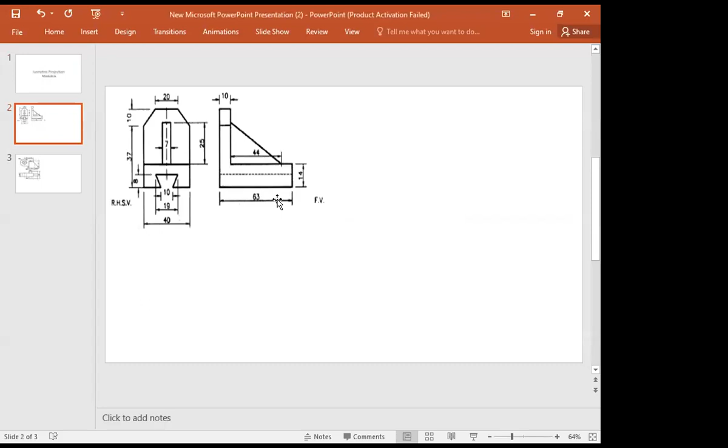Isometric projection.

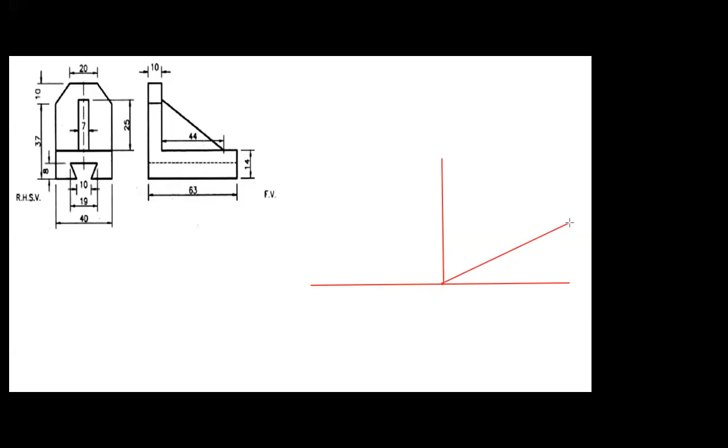Students, just have a look. From this point you have to make two lines. The two lines will be at an angle of 30 degrees. One you make here and one you make here, 30 degree inclination. Two lines you have to make at an angle of 30 degrees.

Now the question comes, what is the length of the line? You can take it random, but both the lines are at an angle of 30 degrees with the horizontal.

Light line you have to make it, guys. Later on I'll use some other color to mark where the things need to be made dark. So light line right now, make it.

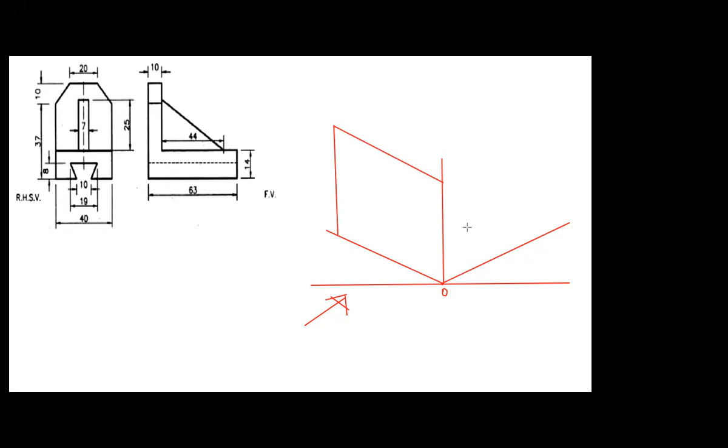By taking that 63, what we will do is we will create a box. ऐसे हम box बनाते हैं। ठीक है? ये 63 होगा इतना, and this is how much, which is your height already बताया था 47। ये 63 by 47 का हो गया, ये 63 हो गया और ये 47 हो गया। This is 63 and this is 47. Make the box, come on।

Now the whole thing will be working on the frame of roller scale. This line will be parallel to this line and this line will be parallel to this line। ये लाइन इससे parallel होगी और ये लाइन जो है वो इससे parallel। Use the roller scale and things will be going in a proper way - रोलर स्केल यूज करके ड्रॉ करो। ये लाइन 63 होगा, ये 47, and then you make a box. It will seem to be like a rhombus, but yes, it is fine. Once you are done, let me know।

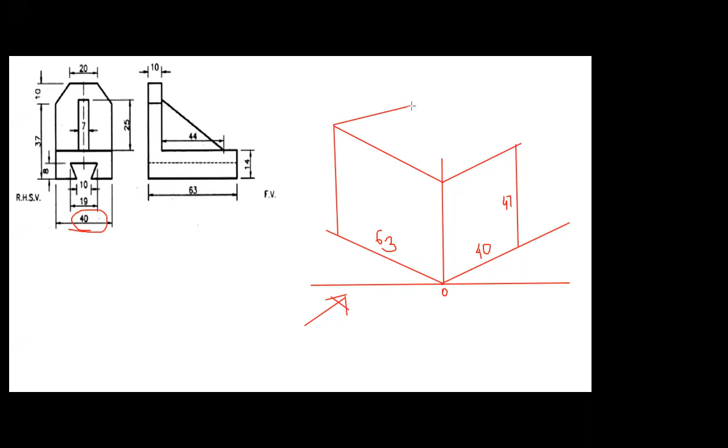After this, what you do is you just complete this box like this। This is the complete box what we have made। Just complete this box।

Yes, जब मैं बोलूँ। सर अभी जो किया वो बता दो ना, like जो अभी लाइन मारा - ये वाला। This line is parallel to this line, and this line is parallel to this line। अच्छा अच्छा, sorry sir। That's all। थैंक यू।

So once done, just let me know। Now you all can see a box। The box in which we will be drawing the whole figure। We are all able to see the box, and within this box we'll be drawing the whole diagram।

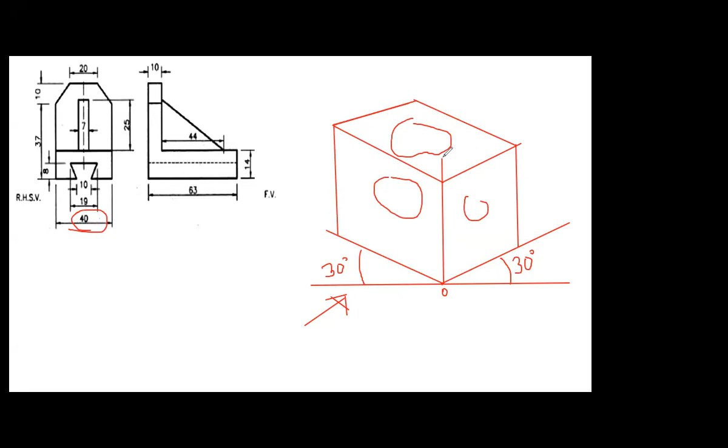Why is it so? Because you are not able to see the portion that is here, or whatever is inside. Are you able to see the backside portion? We are not able to see, right? We are not able to see.

So basically on a piece of paper, we will not be able to draw the 3D perfectly, but we are trying to come closer to a diagram that looks like 3D. Based on observation, this was the appropriate angle defined, at which you were able to see the maximum appropriate view of 3D on a 2D page.

And that is why we are taking the 30 degree angle - it is the angle at which we are able to best view the 3D figure in 2D format, on a piece of paper. I hope it is clear, everyone.

So now coming to the next part, how to draw it. The very first thing you have to do, students, is whatever is given in the front view, exactly what is given, you place it on this plane. As it is given in the front view, exactly you place it on this plane, and then slowly we will move further. Whatever the diagram is given, place the exact diagram here.

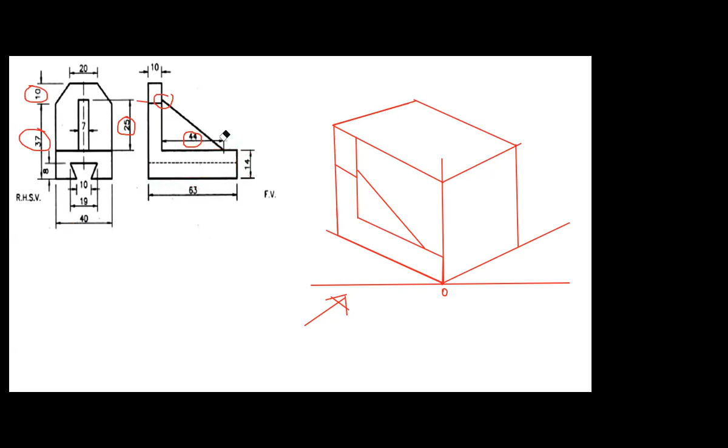No, it is not touching. 37 here, from here it is 37. These two lines are not touching each other, it is not touching here as well. Is it done till here? Everyone done till here? Everyone done?

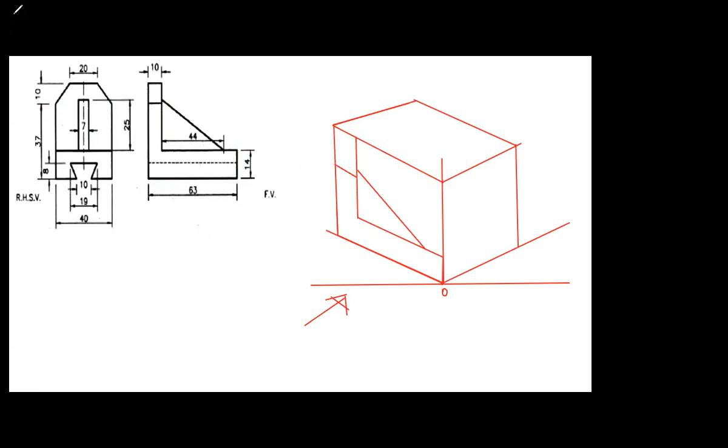Okay, now just have a look. Student, just tell me one more thing, this will be deciding all your factors. Now, if I am seeing a pencil, so in which case will the pencil seem to be like a point?

In top view, in top view. Basically, I can say that if the pointer of a pencil is in front of my eyes, then I'll be able to see it as a point, isn't it? Yes or no? If the pointer of the pencil is in front of my eyes, then I'll be able to see it as a point. Yes or no?

So in that case, being here as a front view, where do I see points, children? I see a point here, a point here, a point here - at every corner. Yes or no, children? These are all the points where I am able to see the corners.

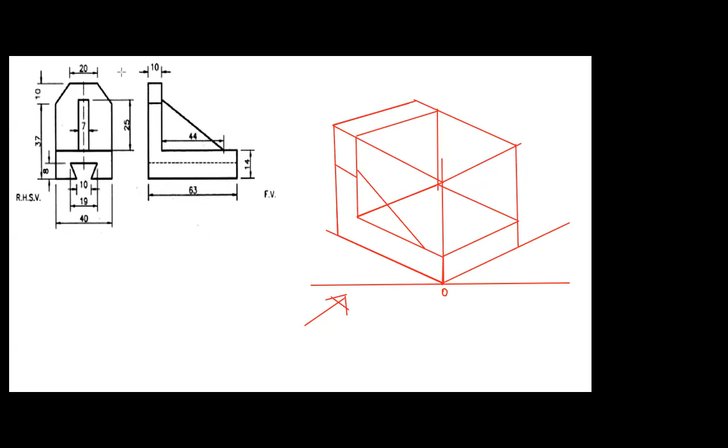Now just have a look. Here it is. This is right hand side view, है ना? ये मेरा right hand side view है, students. In this right hand side view, you can see there is something. ये क्या बना हुआ है? Are you able to see this?

So in the same way, we have to make that here once again. देखते हैं उसको कैसे बना सकते हैं। First of all, you just mark a center point of this line. ये इतना distance जो है 40, उसका center point mark करो। Everyone just make a center point of this line. You have marked the center point.

After then, see this is 8. ये 8 दिया हुआ है बच्चों। कितना दिया हुआ है? 8. At a distance of 8, center line से vertically, we'll be making one line like this. Students, at a distance of 8, we'll be making the center line, this line in this way.

What is the length of this line? So we have taken it right now random. At a distance of 8, the distance is 8 here. Okay, this distance is 8 here. So once it is done, let me know.

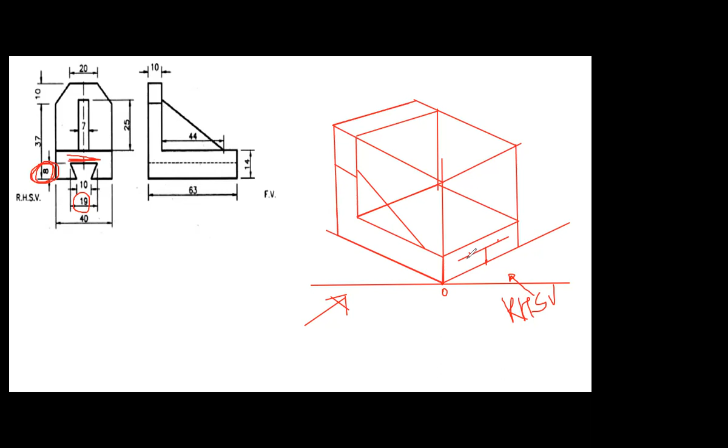We are having the next part, which is this 10. ये देखो 10 दिख रहा है। So what we will be making for 10 is from this center point we'll be taking 10, 5 here and 5 here. 5 right side and 5 left side. Then this will be connected.

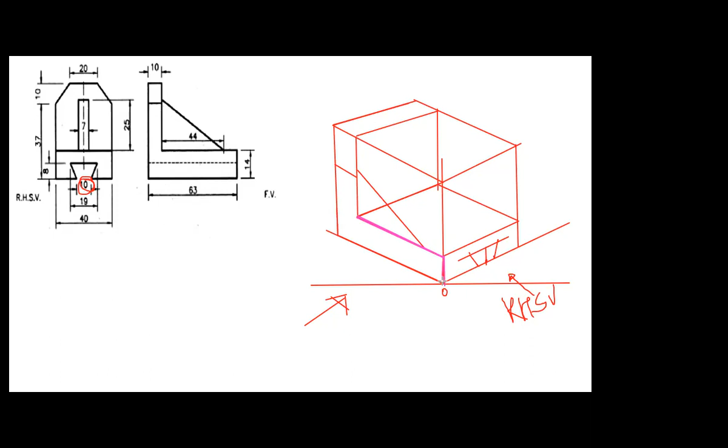Now the things whatever I am making it with a magenta color, this pink color, that much you can make it dark. Okay, so that slowly things will be clear now. इतना आप डार्क बना दो। ठीक है। Just make it dark, come on.

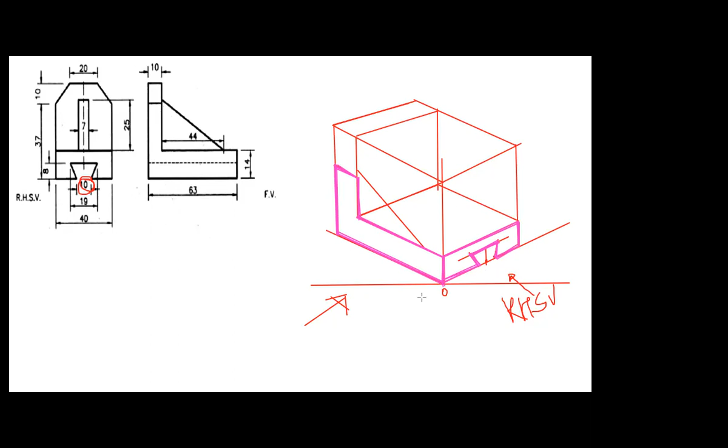Okay, done. After this, what we will be doing? Now onwards, we have to think a little bit from the right hand side as well. Things will be seen from the right hand side as well. So this much things, whatever I have made it with a magenta, will be made dark.

अभी देखते हैं हम लोग right hand side में और क्या दिया। तो right hand side में one thing is mentioned, which is this portion? कौन सा? ये देखो ये वाला portion, ये ऐसे turn किया है ना? Yes or no बच्चों? This much.

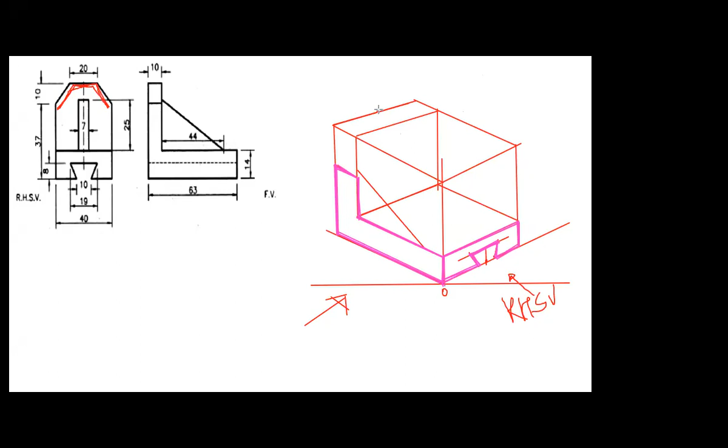So what we will be doing is first, listen. First what we will be doing is we'll be marking a center point of this line. हम इसका center point mark करें। We'll be marking a center point of this line. Come on. It is just a reference center line, we are marking it.

So I hope you have drawn it. इसका center point mark किया, इसका center point mark किया। Wherever I got a center point, I've just connected it. So once you have done, please just let me know. Once you have done, please let me know.

Okay, so what we will be doing here is making this 20 - 10 on the left side and 10 on the right side. This seems to be coming here, and 10 right side which seems to be coming here. So draw a line there, this way and this way.

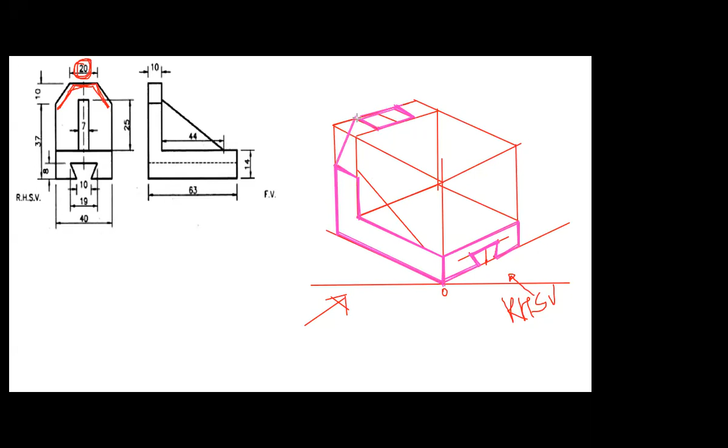Once you have drawn this, make this darker. Then this will be also this much darker, and then this will be connected with this part. Similarly here also, just draw it till here, come on.

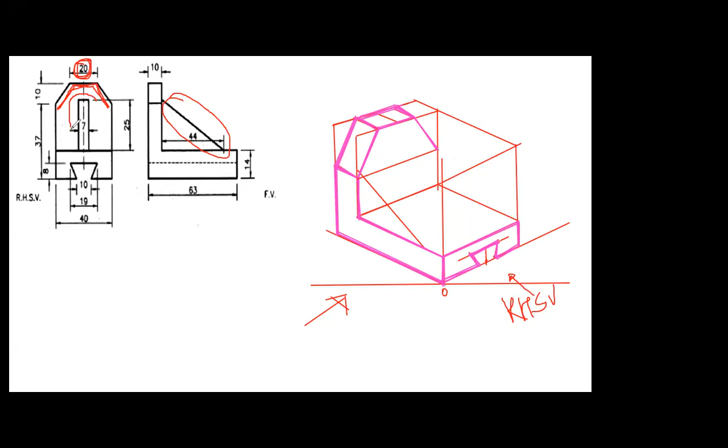So what we'll do next is we have to shift this. Now look here everyone, this rib - when you see it from the side view, which is the right hand side view, it is coming in between. Yes or no, children? This rib that you have drawn here, when you see a side view, it is coming in between, meaning from the center line 3.5 left and 3.5 right. So in a similar way, we have to think about this rib.

So now how will we do this? This center line that you have already made, from there you will drop one line down, and then you will take that line till here. Again, light line - every time I'm telling you light line, because your diagram should seem like you are drawing the different figure. So this is how I've drawn the line.

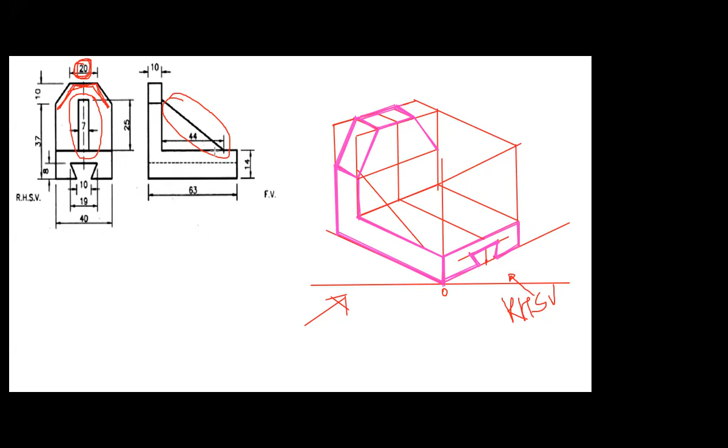This is just representing a center line, children. This center line that is here - this is the center line we made over there. This center line. Okay, that center line we have made.

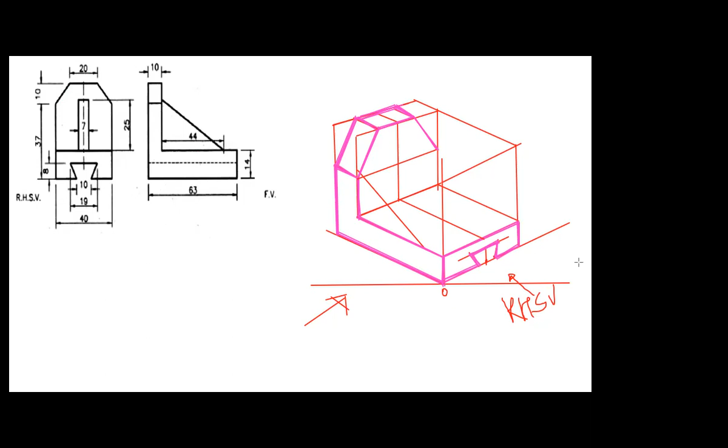Okay, once you have done that, after that what you have to do - once again look here, I see a point again, so what I'll do is shift it there, backward, light line. And similarly, I am getting a point here as well, I will shift that point once again - shift it like this. This point I have shifted to the back side, and here there was a point of the rib, I shifted that also to the back side. Okay. Is it done till here?

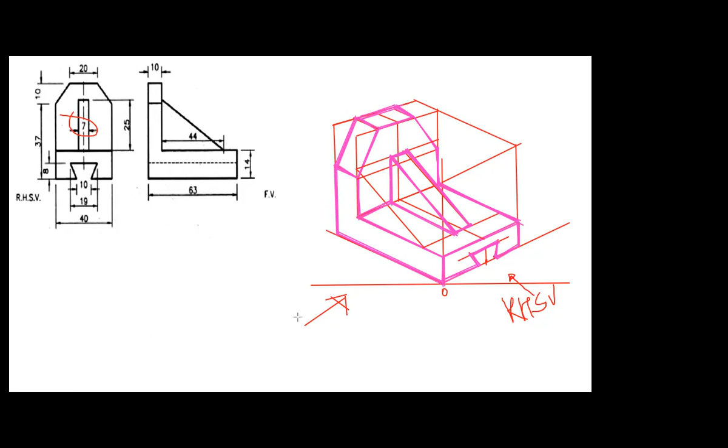So this is the final diagram. I'll just erase it for you all so that you can understand.

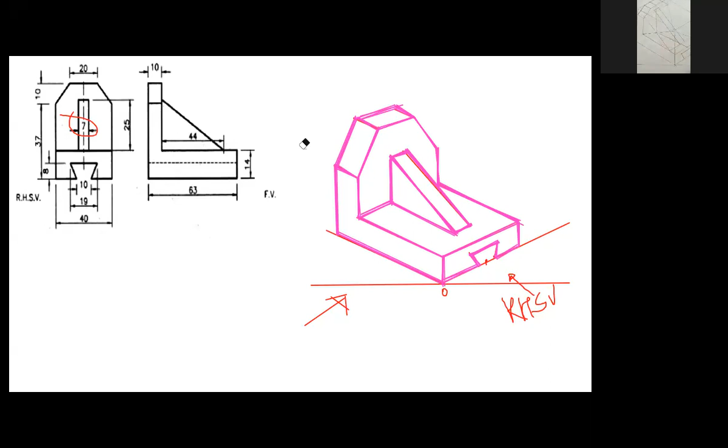What you have needed, sir? Let me check.

Where did Himanshu go? Himanshu, your voice is not audible. Himanshu is here.

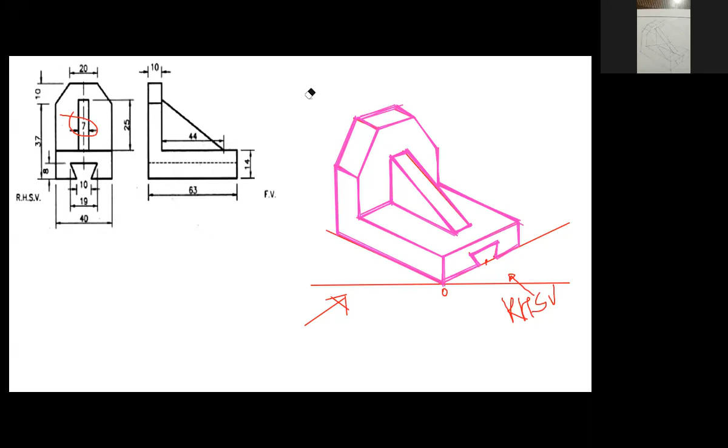Right now, who was speaking? Can you raise your hand once again? You just now asked a doubt. Who was that person? Can you raise your hand? Yeah, Himanshu, no issues, wait a minute.

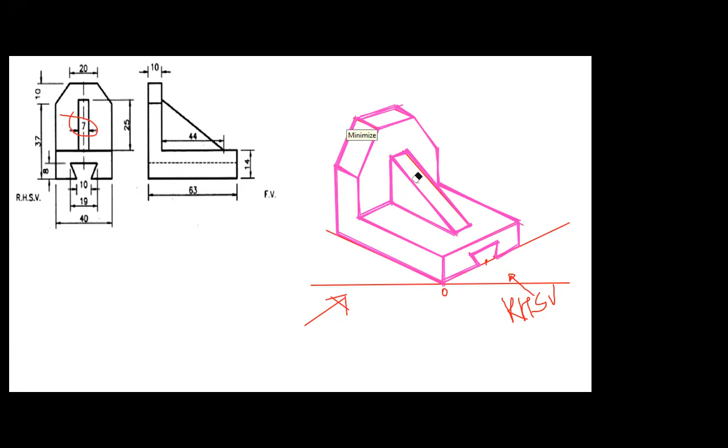Yes, please. So now, till here we have done. The last part, what we have to understand is...

So we just have to dark the lines. Yes, we have to dark the lines. One more thing is pending. What is this one?

From here, we have to make a line on the backside, such that the hollow slot will be seen. This line will be parallel to this line, and this line will be parallel to this line. That completes your whole diagram. So once everyone is done, please let me know so that we can move to the second diagram.

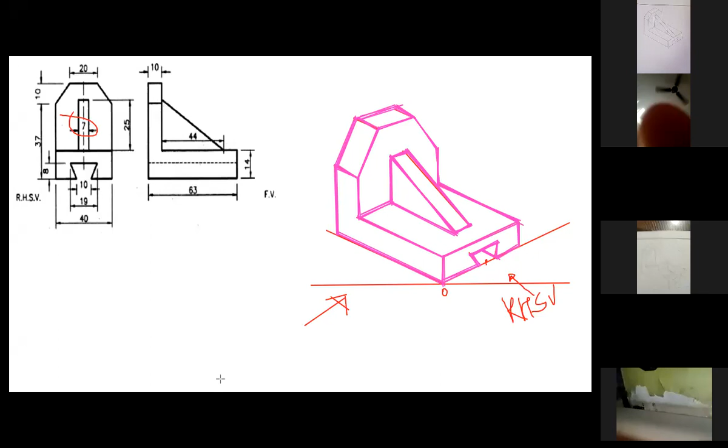The diagram is complete now. Sejal, mute yourself. So the diagram is completed now with this particular thing.

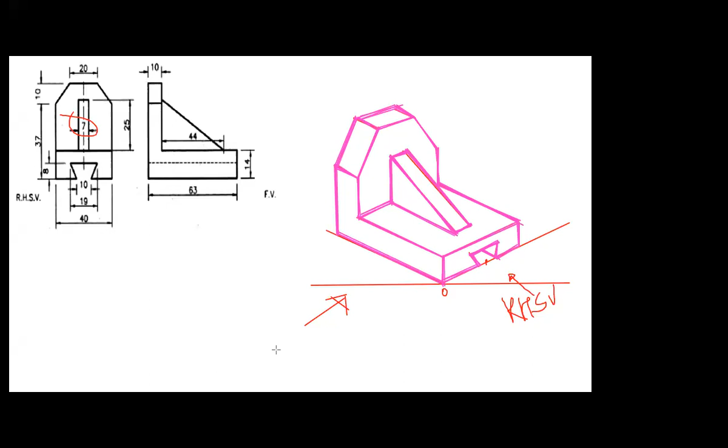Now we will be drawing the second diagram. The second diagram will be this one. Let me erase this.

Yeah, this is the second diagram. What we have to make, children - so can we start with this? Come on, start.

The second diagram, let's start. Come on, start drawing the diagram. Everyone start doing the second diagram.

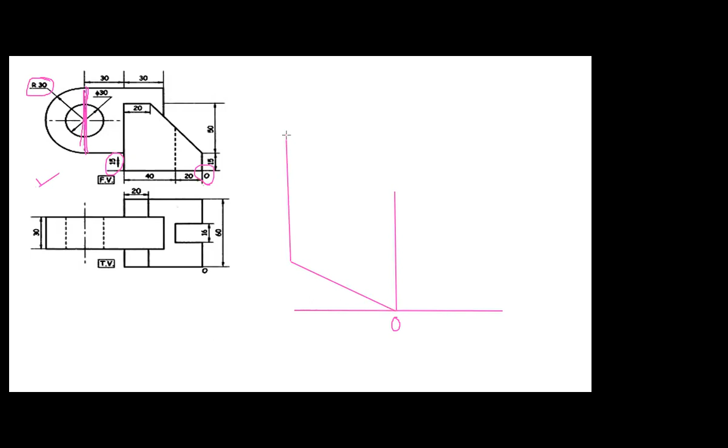See, this is O. So to the left side of O, the whole diagram is coming. That means what? This particular diagram will be coming here, in this box. Did you understand? It will be coming in this box.

And then width is how much? 60. So this line will be 60 - this will be your 60.

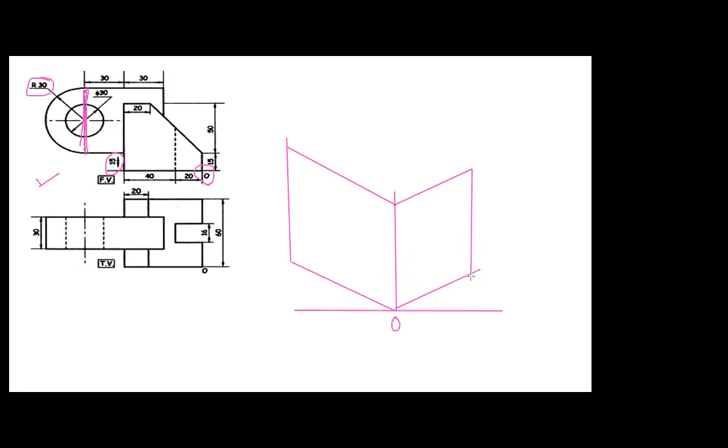Getting it? Width is 60. So with this, we'll complete the box. And then this box will be completing this figure.

I hope it is clear. The very first step is you will be drawing the front view here itself. You draw the front view here and then slowly, by seeing the top view as well, we'll complete the whole figure. I hope it is clear, everyone.

So the second diagram you are supposed to do on your own. At the same time, for section of solid and DLS too, you have to do the second diagram by your own. How to draw the circle in the final diagram?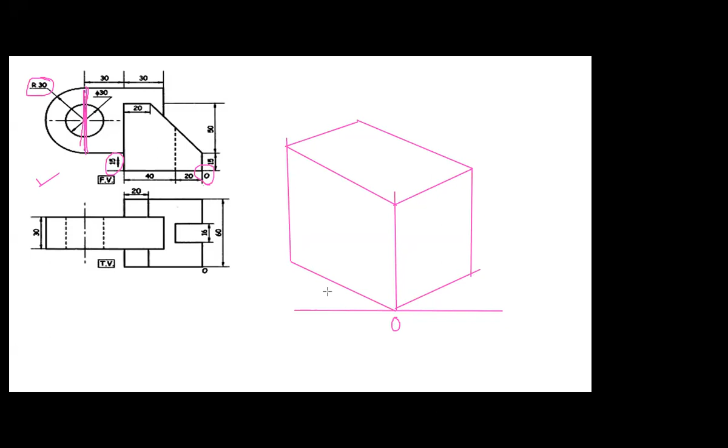Let's look at the circle now. There are steps for the circle. I'll erase this part and show you how to draw the circle. In the case of the isometric, the circle seems to be like an ellipse. It seems to be like an ellipse.

Let's see how to do it. The length is 120. How come 120? 30 plus 40 plus 20 plus radius 30. So 30, 30, 60, 60, 40, 100, 120. Yes, correct, 120.

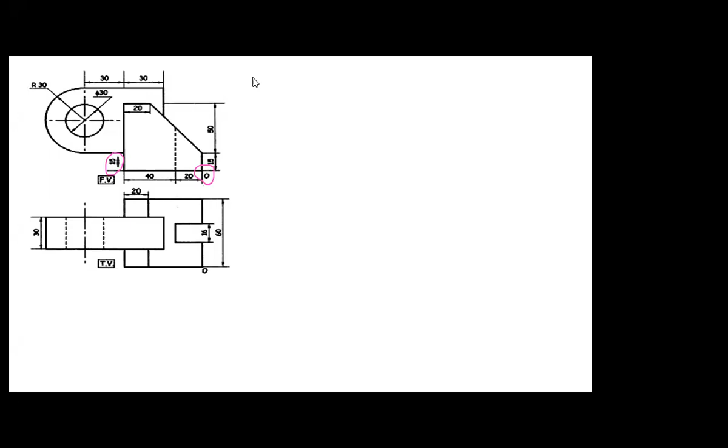Now check how to draw the circle. So if I want to draw a circle of a radius, let's take an example that I am drawing a circle. This circle has to be drawn, and this is the circle to be drawn.

Let's take an example that the circle has a radius of 40, and I am making the circle this way. This is how the circle has to be made. So what will be the sides of the square? Can you tell me? If I am making a circle inside the square, what will be the sides of the square?

So it will be similar to the diameter of a circle, isn't it? Yeah, it will be similar to the diameter of the circle. So in that way, suppose I want to make this inner circle, how will we make it?

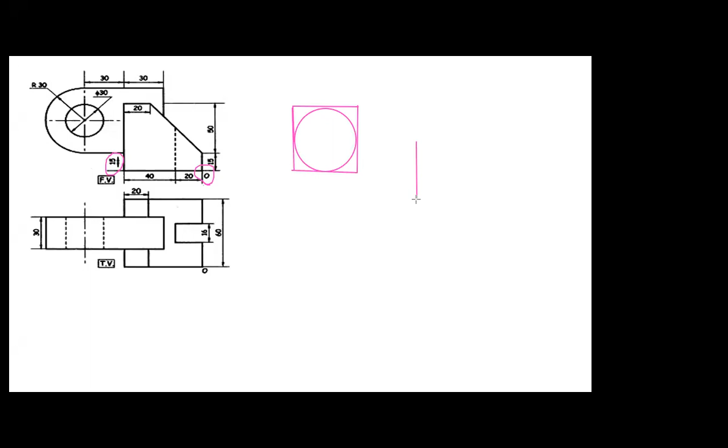After this, what we will do is we will join the larger diagonal. This is the larger diagonal we will join. So we are joining the larger diagonal. After that we are marking the center point of each side.

Marking the center point of each side, students. After this we will be connecting the midpoint with the opposite vertex, in this way.

After this, how to make a circle? You have to take this much distance in your rounder. Take this as a center and make an arc like this. Are you getting it? In this way, you have to make an arc.

In similar way, you have to take this much distance in your rounder, this as a center, and then you have to make this arc like this. This is how the arc is made.

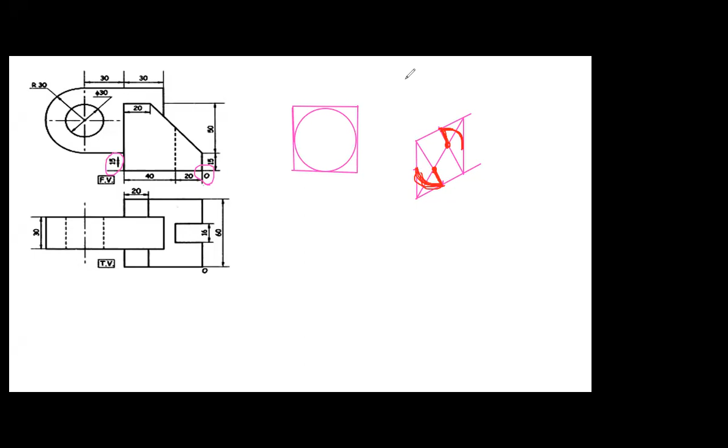We will be taking this much distance in a rounder, that distance we'll take in the rounder. Is this color seen? Is it seen, the color? Okay, this much distance we'll take in a rounder, taking this as a center, and then we'll complete this arc, making the arc.

In similar way, we will take this much distance in the rounder, this much distance in the rounder, this as a center, and then we have to connect this.

So ultimately the circle you will be getting will be in the form of an ellipse, and it will look something like this. Are you getting it? So this is the way to make the circle in the case of isometric drawing.

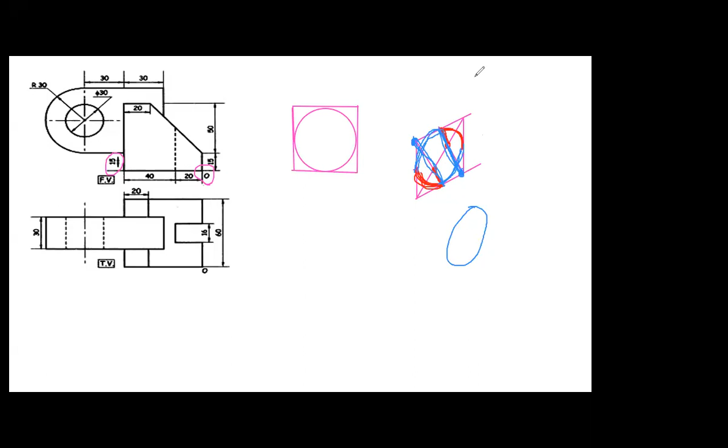The rhombus length is 30. Yes, rhombus length is 30. Anyone else has any question? Yes, Omkar, go ahead.